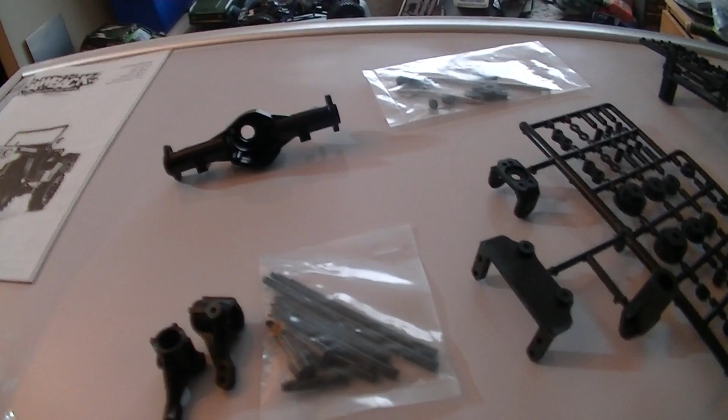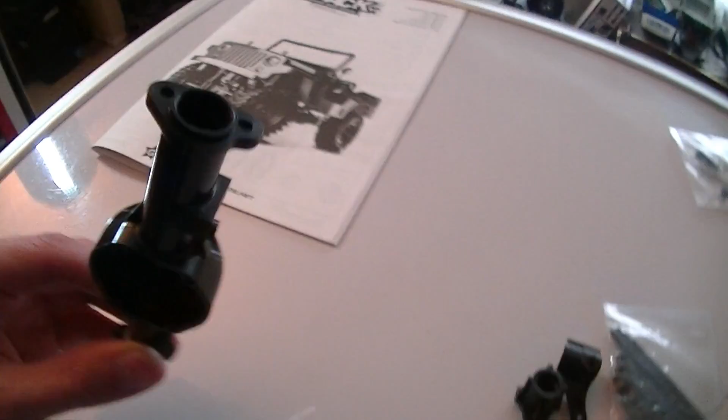But there are a few things I want to point out because, like most of you know, I run Axial like crazy, so just a couple quick things that are differences. Solid axle housing instead of having a two-piece like an SCX-10, so you got the cover off the back like a little Wraith. Then the C-hubs don't sleeve over, they just kind of got a little bit of a flange there. Let's see if we got better light. And there's just a bit of a flange there that looks like the C-hub. There's one there, I'm just going to go over.

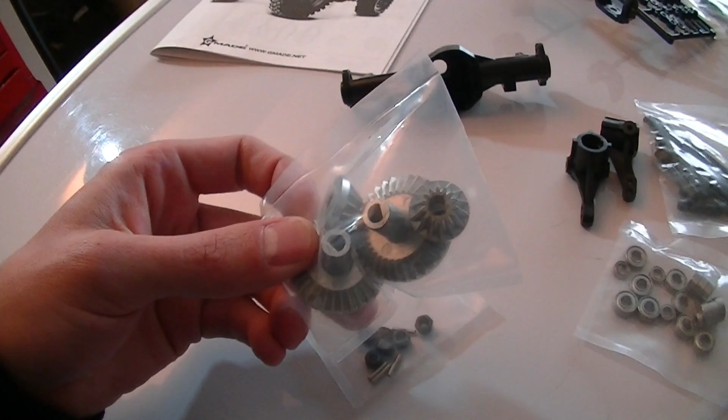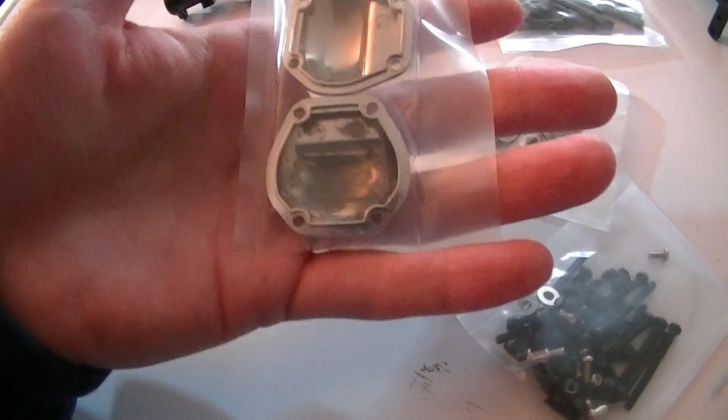Servo plate, I haven't gone over all the parts. There's all the bearings, it looks steel shielded on both sides. Solid center diff pieces instead of having the two-piece like the cup inside with the locker in the middle. Those covers are metal, those are cool. One of them is starting to, not corrode, just starting to oxidize there now. They give you grease with it, which is nice. A little Allen key, I don't know what that other piece is for yet, but alright.

So I just wanted to point out, that's all I'm going to do I guess, is just kind of show you the differences. Comes with, those are your steering links I would imagine by the look of them. Comes with aluminum steering link, or steel, it could be steel steering link. Alright, yes. Any other differences that pop up, I will show you. I guess those are the knuckles? No, those were the knuckles.

Alright, do a little bit of assembling and get back to you.

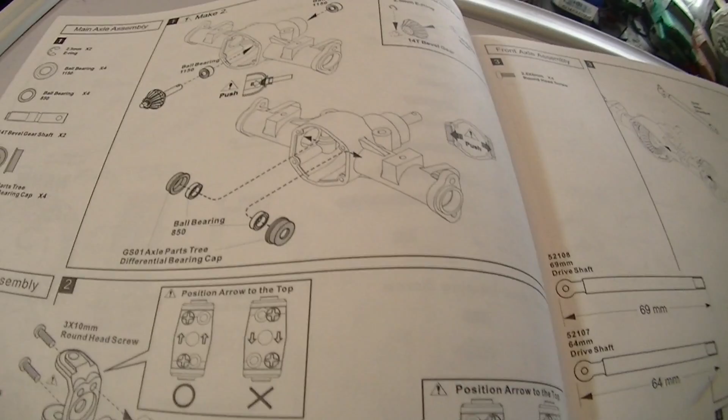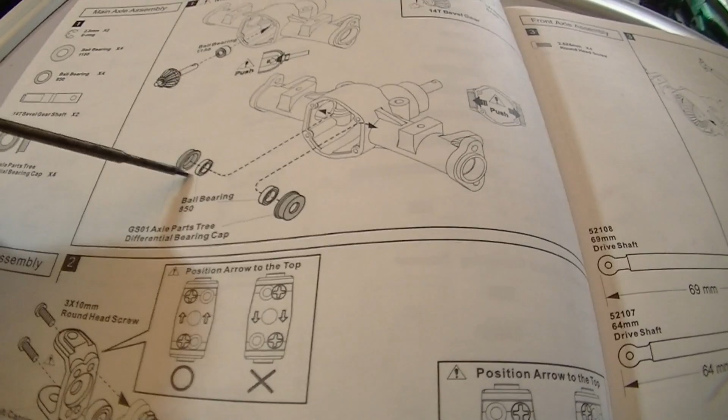Okay, so as I move on, I'm just going to show you guys the funky stuff that's different from an SCX-10. It's funky to me anyways because I don't know Gmade stuff. But anyways, as you can see inside the axle housing, it's easier to see in the drawing than it is in the real thing, but there's this big gaping hole, as you can see, this chunk of plastic. The bearing goes into the plastic, and then the plastic gets inserted into the axle housing, and that's what supports the drive shaft instead of the gear.

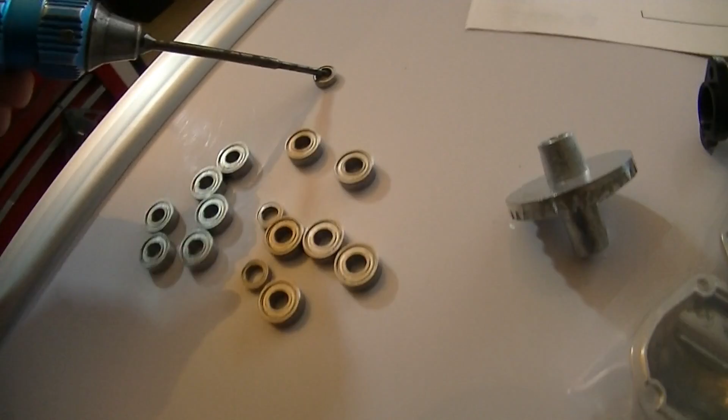So I don't know about that myself. It's these pretty small, little ones, they call it an 850 bearing, so I don't know if that's 8.5 mil or what, I don't know their numbers. But yeah, I just thought that was weird. Must push them out, so you got to seat them in there. That's weird, I don't know. We'll see how far that lasts, and then I might as well show you now.

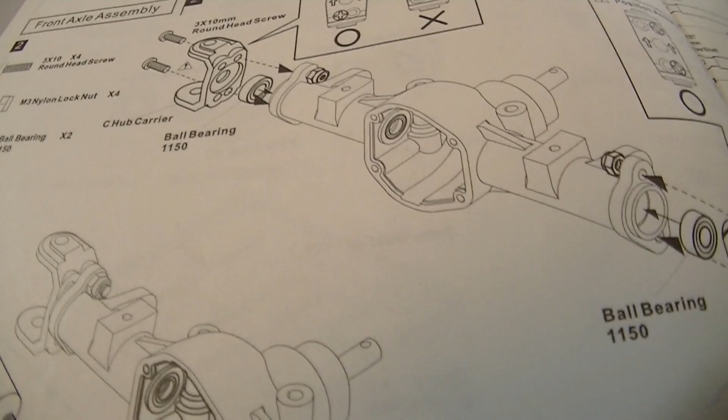The knuckles are these plates that go into the end, or no, that's the C-hub. Sorry, the C-hubs are so different, but the bearing seats into there. Yeah, so it's different, that's for sure. But you know, it's moving along. Alright, back to work.

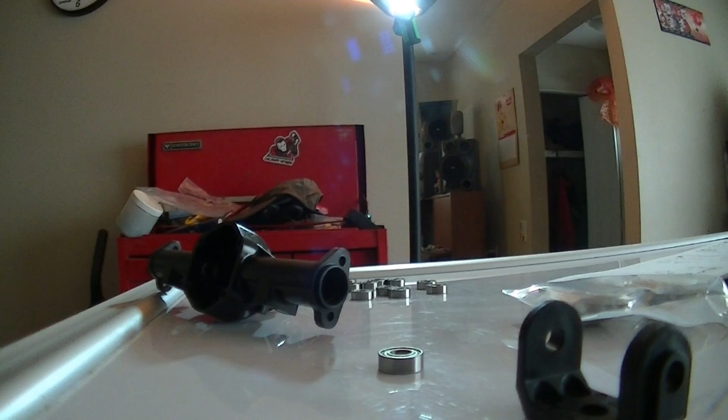Just rest this, that'll be okay. Sure, that works. So the bearing gets inserted into here, into the end of the axle, and then there's a small sleeve, or flange if you will, that just holds that there. And there's arrows on it that point up, so I'm matching the picture. If that one goes that way, then the other one gets snapped in there.

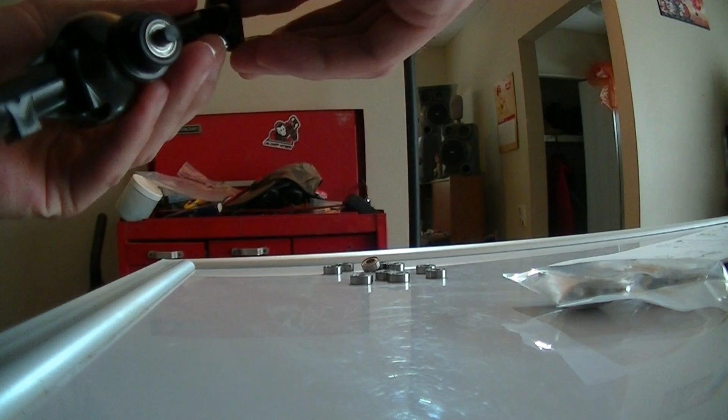There's another one of those plates somewhere, or the C-hub I guess this would be. What are they calling it? C-hub carrier. So I already got the bearing in there, arrows up. And then it gets two screws that holds it into there, and then we'll be putting in the shoulder screws.

It doesn't look like it uses, you can see here, it uses a shoulder screw, or a step screw they're calling it, instead of using the little top hat that the Axial uses.

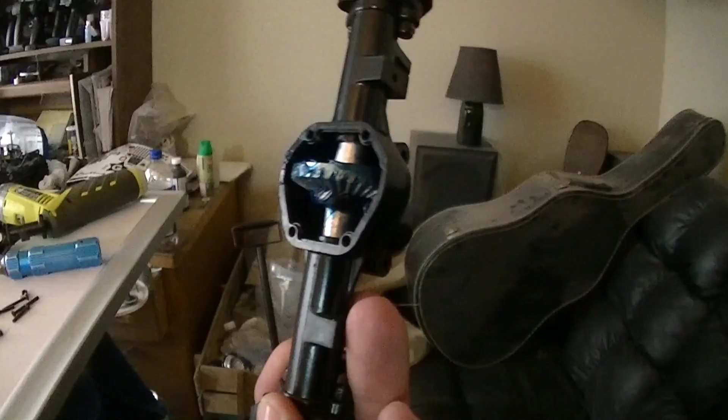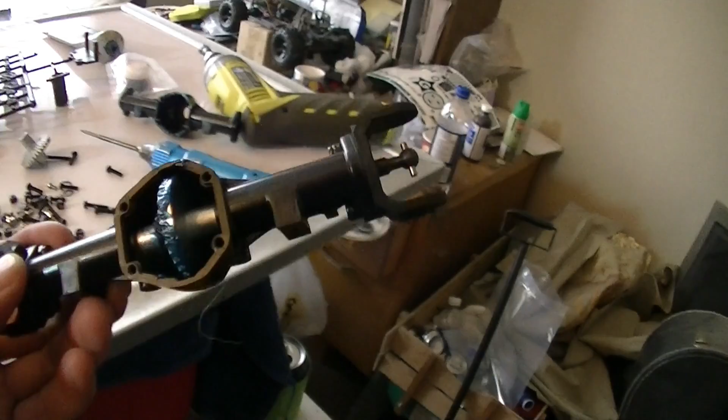Alright, moving on. So I got the gears installed, and then I got it greased up and assembled. It just seems weird to see the center diff like that, and it's not using any bearings - the bearings are inside the axle housing, inside those plastic sleeves. Just wanted to show it like that before I put the knuckles on and get that metal cover on there.

And then on to the next one. I'll get those two built, and I think it's either tranny or chassis next. We shall see.

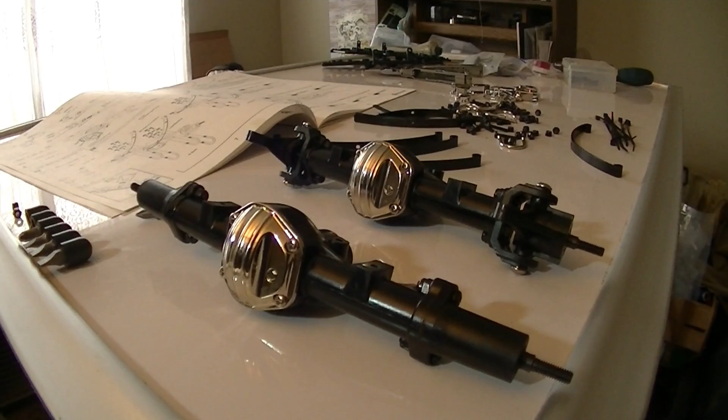Alright, so the axles are assembled, the knuckles are on, but I haven't done the steering yet, because I'm just going in order of the book, following it. So this is pretty interesting. Oh, the fun of kits, aren't they?

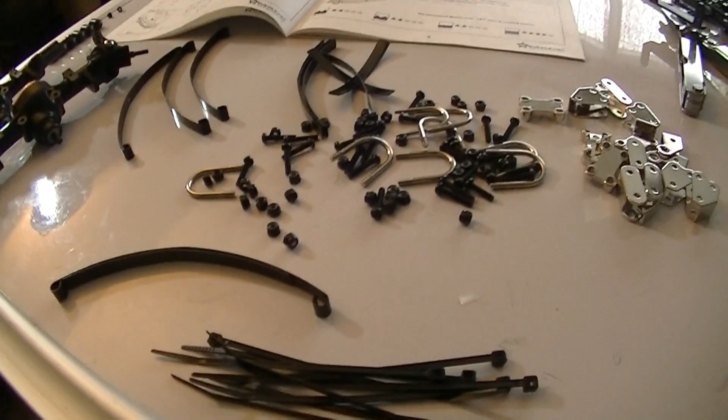Twist, twist, turn, turn. Well, I got my little Ryobi drill helping me out there. But anyways, this is what I was going to show you. So you get the three sets of all the leaf springs, three of them per, if you know what I mean.

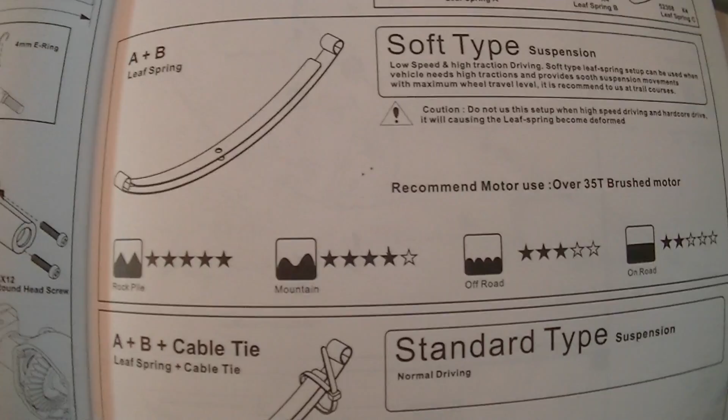Anyways, in the book it's giving you the leaf setup type. So you got the soft type, standard type, and hard type. Obviously with 3 springs, 2 springs, and 1 spring, or just setting it up with the small one and the big one, and then the medium one and the big one, or using all three to make it all stiff.

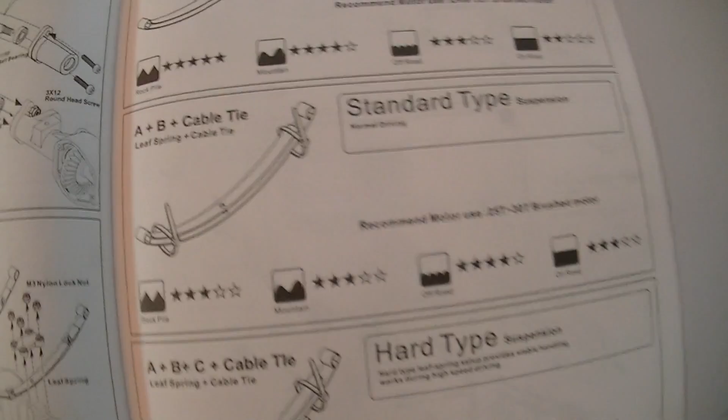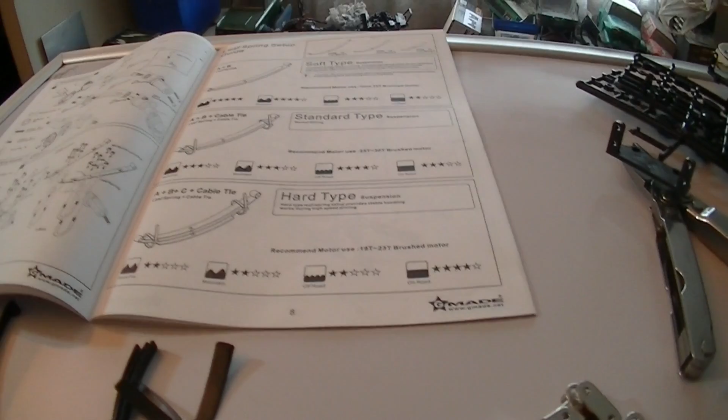I'm going with the medium one and the big one, and it's got motor recommendations there as well, for a faster truck. But see, without a roll cage, there's gonna be no roll cage on it, it just has the windshield up there. I'm not too keen on rolling it over, although I know I'm going to get dick moved more than likely by SS Louis, if not Crawler Ted, maybe even Penguin. Hopefully it's not Penguin, because he's going to mess my shit up.

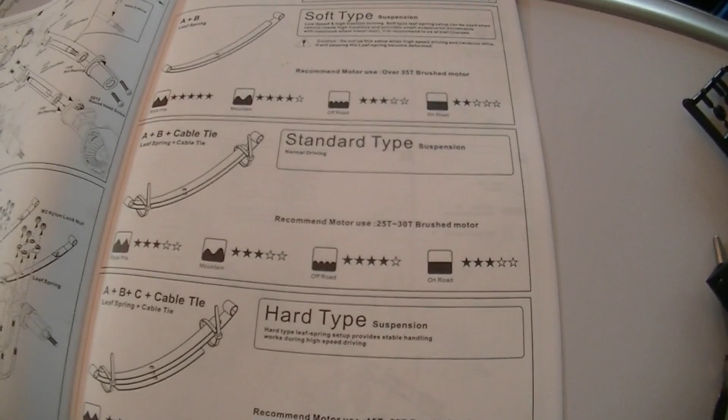Anyways, I think I'm going to go with the DeWalt on 2-cell, and the DeWalt on 3-cell is about a 20 turn, so I'm saying it's about a 27 or 30 turn, which works out perfectly for the standard type setup. That's what I'm going to end up going with. I just thought that was pretty cool. Jeez, doesn't that all look like fun, eh?

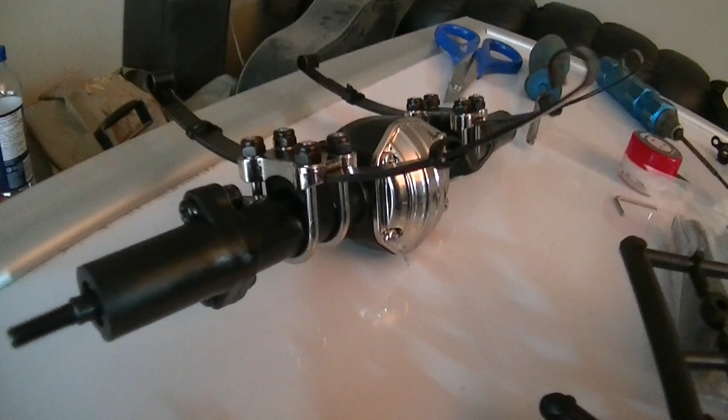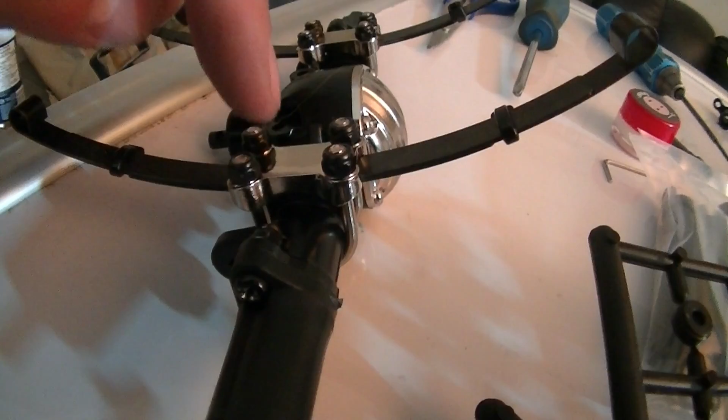Ah, kids, good times. Alright, I've been trucking along for a while. I've already got the axles good and assembled. I can't remember what my last clip was, to tell you the truth, but the leaf springs are in and assembled. It's just a pin right in the middle, in the bottom of this plate that goes through and lines up with the holes in all the leaf springs. I ended up going with the full meal deal, and I got all the toughest setup.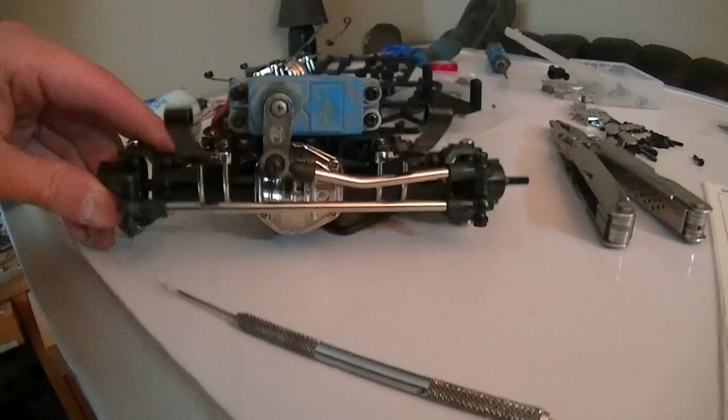I even got the zip ties on there. The steering's been installed. It comes with steel steering, which is nice, and those caps are sharp. I love looking at those. Alright, and right now I'm on to the tranny, and yes, it does have plastic gears in it. We'll be looking for upgrades to that.

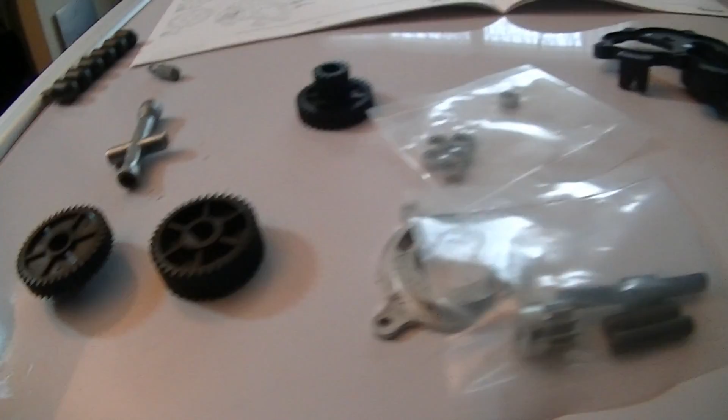Still got to do the shackles and whatnot, or whatever they're called, to the drive shafts and blah blah blah, the chassis and the skid plate, and oh my god, there's still so much to do. The part that worries me, and the main reason I turned the camera back on for the tranny, was these little bearings. They call them the 850 bearing.

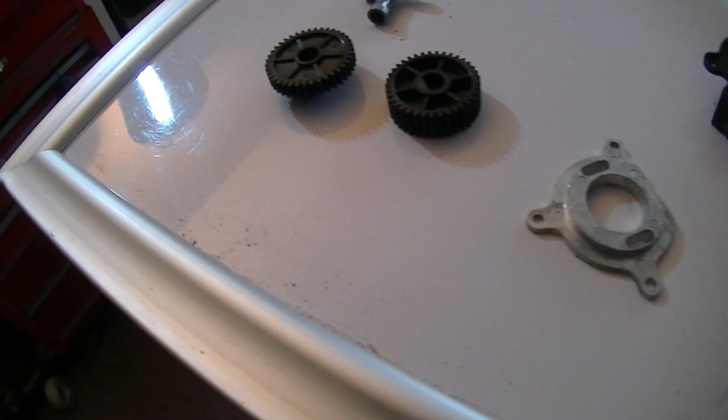Again, I don't know, I only know millimeters. I don't know what the 850 means. I'll have to find out later. Or you guys probably already know. But yeah, I just wanted to show that those little bearings kind of worry me. Alright, there you go.

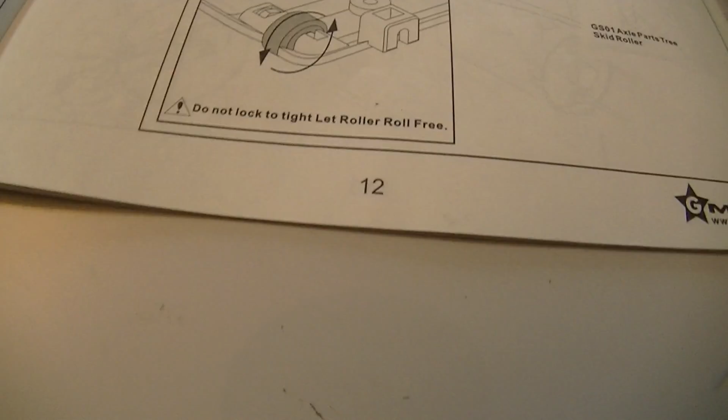Alright, just found something else kind of interesting in there. It's called a skid roller. There's little wheels that go on the bottom of the skid plate. So when you're driving over stuff, they're supposed to help. There, we get some light on there. It's supposed to help you get over stuff. Pretty wild, eh? I don't know if it's going to help or not, but that's cool.

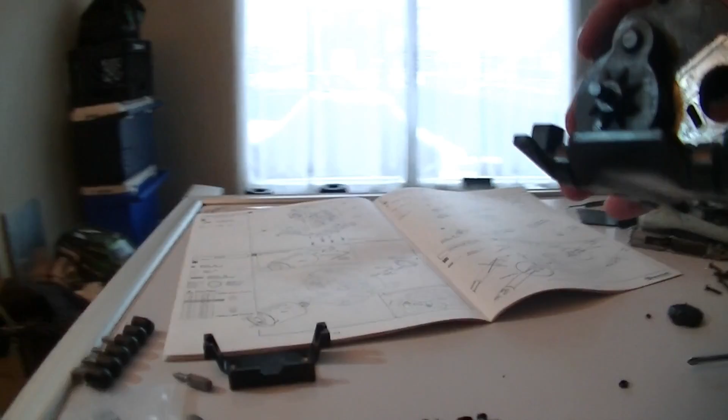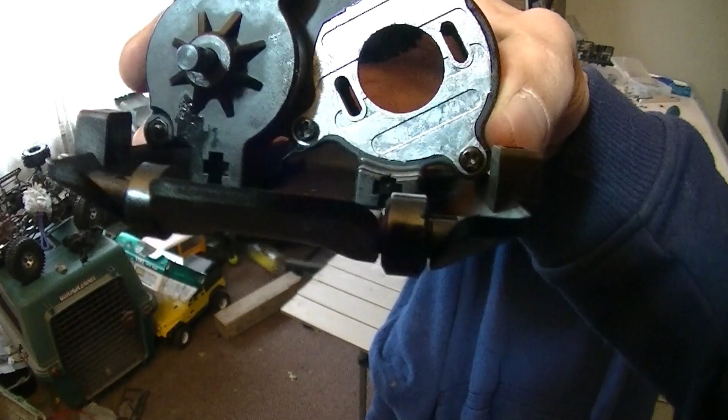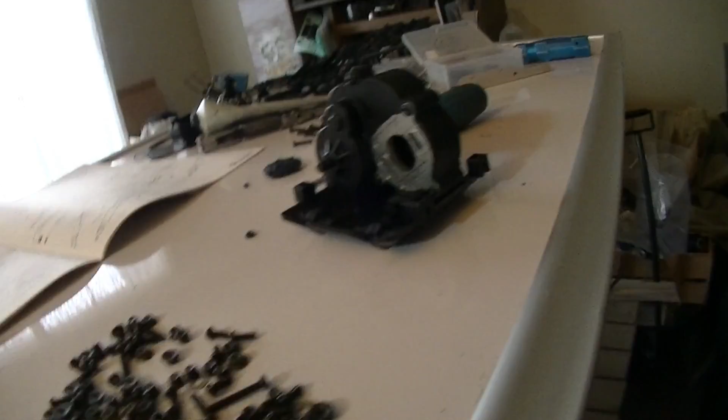So you slide in the nut and then you put the screw in from the bottom, of course. And you're not threading into plastic, you're threading into metal, or into the metal nut. It's great. That should be stronger, but we'll see how it goes.

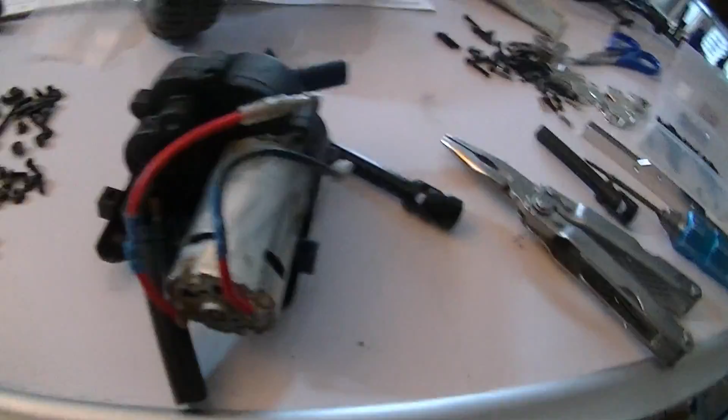Alright, so as I trudge on, I'm getting tired. I've been at it for a good 3 or 4 hours with about a 20-minute break in there or so. I just got the trannies done being assembled with the motor attached to it. It's a DeWalt 12-volt big shocker with whatever the stock setup is.

32 pitch, 12 tooth gears in there. But I wanted to look at the shafts. The shafts are pretty beefy. They're pretty much the same setup as the stock SCX-10, or the old style ones.

Those are the new style ones. I don't have any of the old left, I don't think. They're all gone. Or is that one right there? That looks like it might be one.

Hell of a look at the difference in the size of those two shafts, from an axial one to the Gmade drive shaft. I don't know the name of them, if they have a specific name. Universal shaft assembly, blah blah blah. I don't see a name for them. But anyways, yeah, they're pretty beefy, huge compared to the SCX-10 ones. Just wanted to throw that out there.

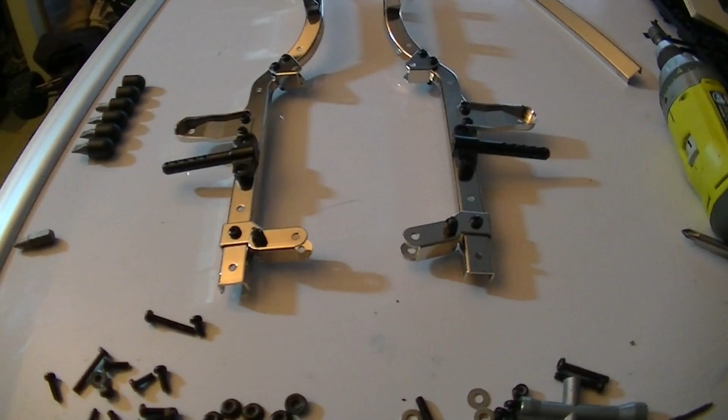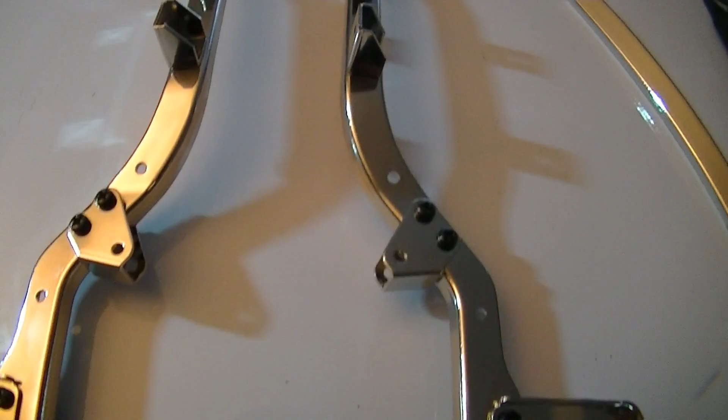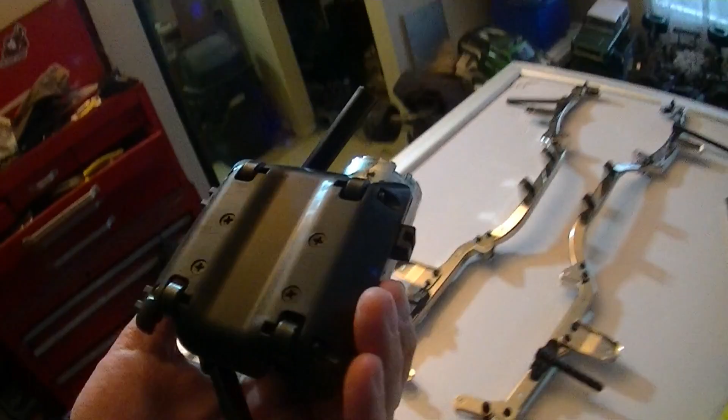Oh, it was so much work to get to this point. There's so many screws and bolts in there. It's looking great though, it's just gorgeous. Shiny. The tranny's mounted to the plate with the little wheels on it. That's just awesome, that's so funny. 12-volt DeWalt.

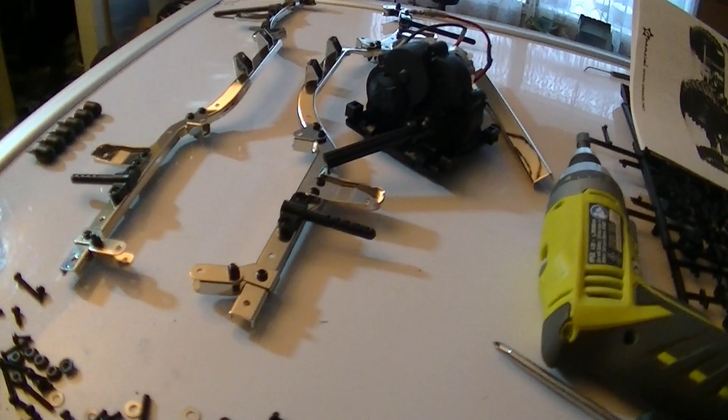Axles. Oh, I need a break for at least a few hours. Maybe finish the chassis tonight and do the electronics tomorrow. Still got to paint still. Oh, so much work, I'm so tired. I'm gonna go, I need a long break. Could be for the night. I don't know, good night for now.

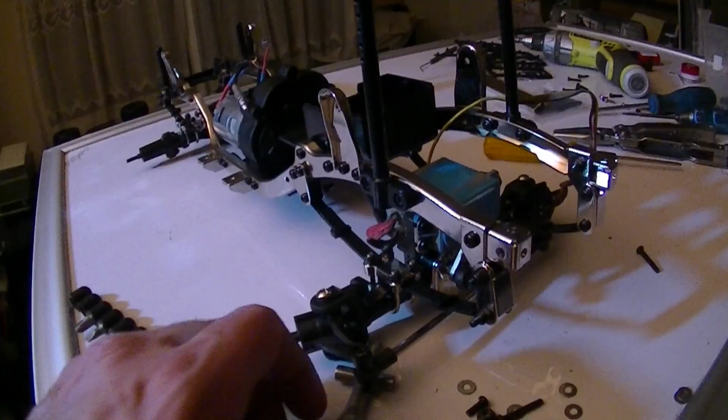Alright, so I took a bit of a break, but I have been working. I came upstairs and I've been working away for like half an hour, an hour or something now. So the chassis is assembled and I got the receiver box in there.

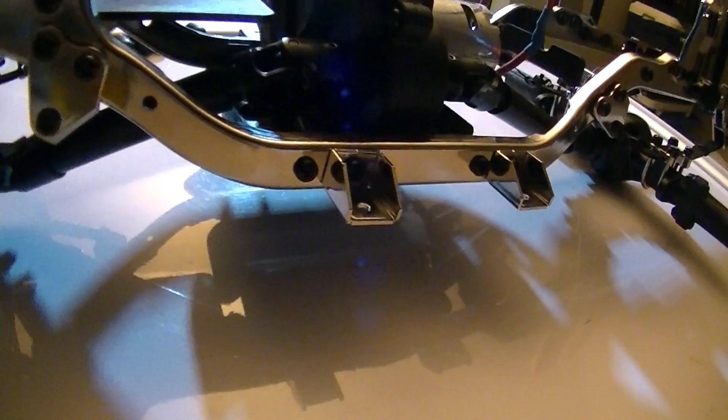It looks like there's a plate for the ESC. A battery tray goes in the back, I'll just use a Velcro strap for that. Oh, I just noticed I put two things on upside down. That's going to be a slight pain to fix, maybe. Hopefully not, probably not, I think I could fix that quickly. Let's see.

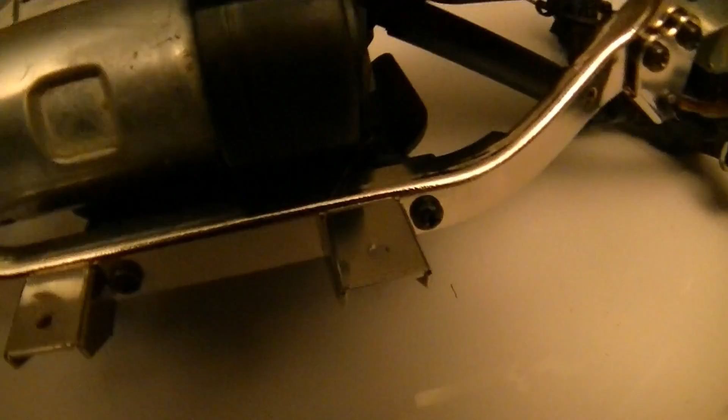Everything that is screwed in from the side that on an SCX10 you would normally strip out, like on the plastic parts, the cross members or whatever, everything uses a bolt. Some of them are a flanged nut, some are a nylock. But even the skid plate is held in there. Man, I don't know if there's enough light. Even this skid plate, there are little slots for where the nut gets dropped into.

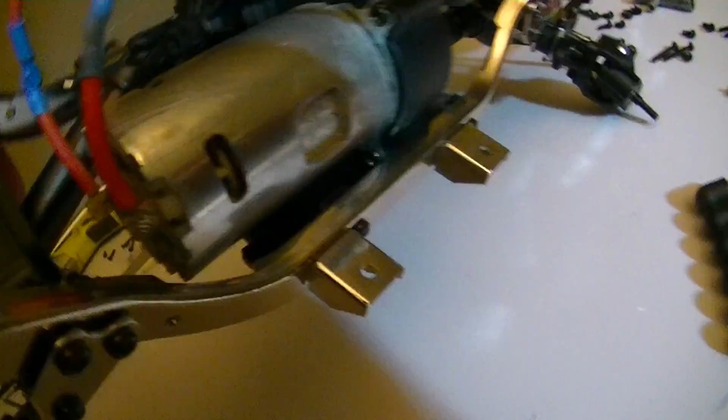Oh, the lighting's terrible, hold on, let's see if I can get this. There we go, should be able to see that hopefully. See right in behind there where the screws are, there's nuts in there, and they're all like that.

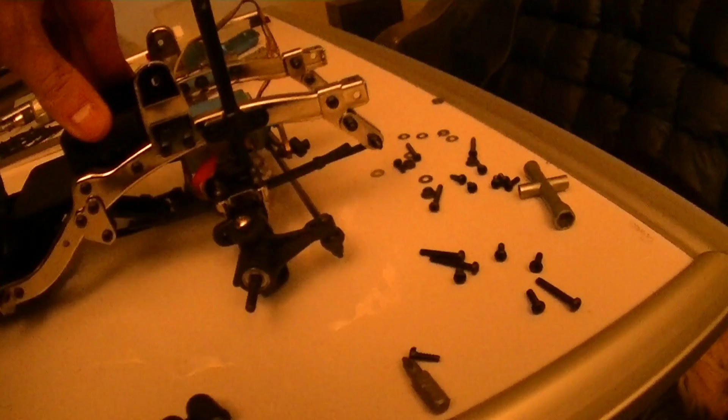I know I'm really tired and sluggish and talking funny sometimes because I've been working at this all day and my brain's a little mushy right now, but I'm not minding the springs too much. The rear seems a little stiff, I think I gotta back some screws off. I really like the action out of the front though, it articulates decently. I like the function of it so far, but I gotta get tires on and get some weight in it, get some more going.

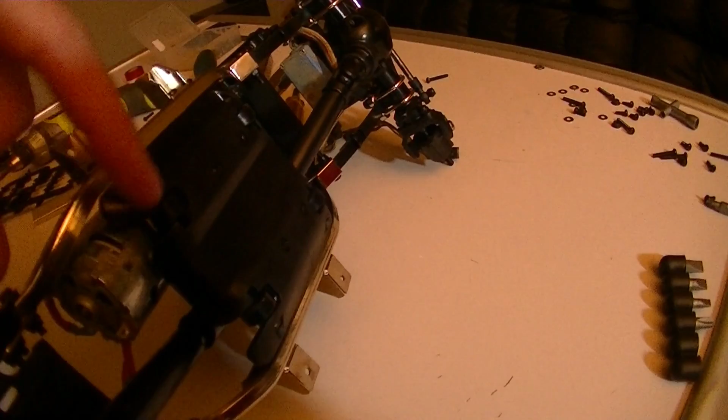Oh yeah, I forgot, that's one of the main things I turned that on for. Check that out, there's little wheels under there. I think I mentioned that before, I'm just showing it again because it's cool. Alright, it's a rolling chassis.

I am pooped, I'm tired. This thing is gorgeous, I love the hoops that go around the axles for the springs, shackles I guess they were. The chromed up chassis looks just awesome. The front bumper's plain Jane, like just a slab of steel, but it's wicked. Those tires are nice, 11.5 inch wheelbase, 2.25 inch skid clearance.

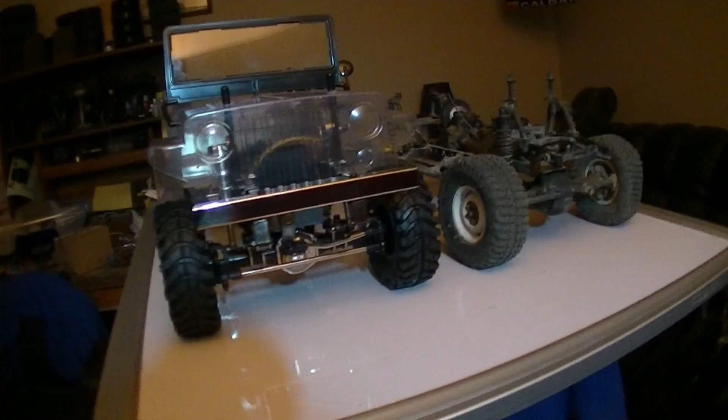The sawback has been cut and drilled and some of the accessories popped in just to test for fit, so the shift is in there. I didn't put the seats in, but I know they're going to be fine. He's just holding onto the steering wheel for looks. The windshield actually just pops in there, so you can see extra plastic has gone inside. I figured I'd show you this before I painted it so it's easier to look at.

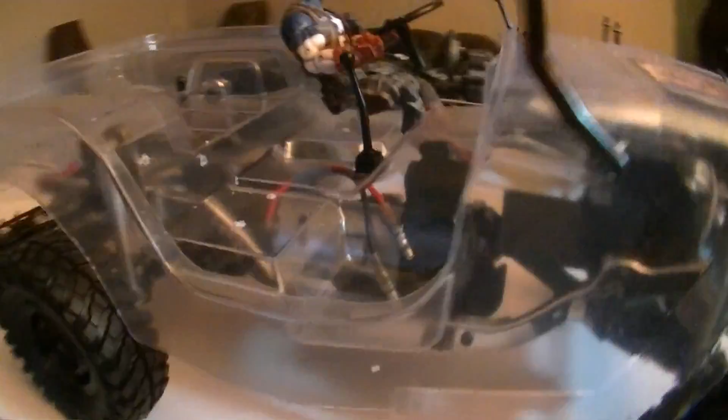Same thing with the mirror and the gear shift, they're just popped in there, but those two are held in by a body clip. This center piece is held in by a body clip as well, which is not in there right now. The windshield is separate Lexan or plexiglass that's just held in there with grooves on either side, so you just snap it in place. It's in there pretty good - solid black plastic, and I didn't have to paint it, which I really like.

I got it sitting beside a stock, well, the closest thing I have to a stock SCX10, pretty sure it is stock except for the tires, just to do a comparison. So my final overview comparing the Gmade Sawback and an SCX10 - it wasn't meant to be a versus, it's just my best thing to compare to.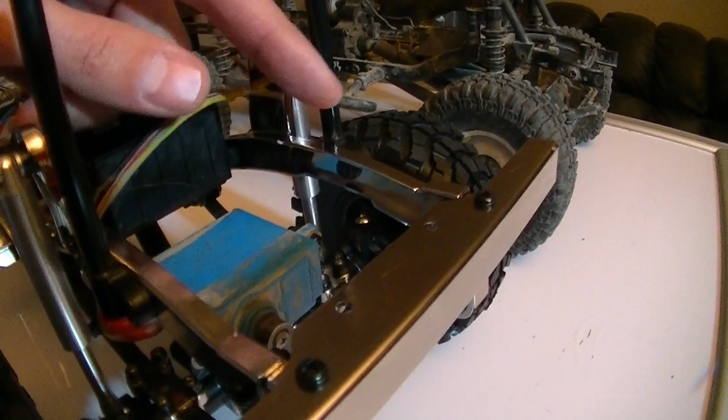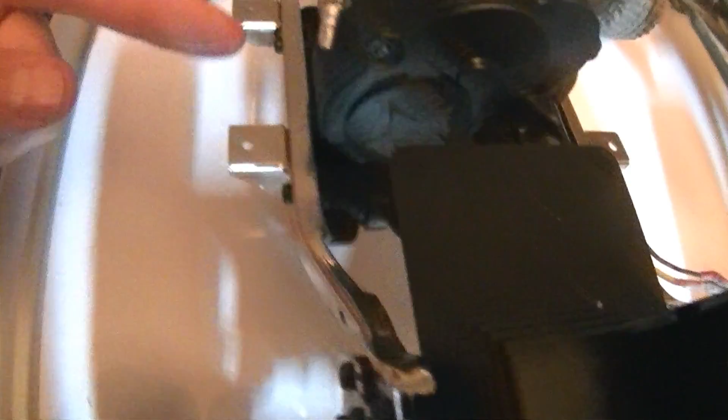One of the main things I noticed about this truck is that everything on the side that's held in place to the chassis is held in by a nut. Nothing is screwed into a piece of plastic in this truck anywhere, even the skid plate - there's a nut that drops into the slot, and then the screw goes in. The only thing I don't like about the screw kit and nut setup is everything's with a Phillips.

There's no hex head in this thing except for the grub pins, and they're 1.5, not a 1/16. Everything else is held in with a screwdriver. I just didn't like that. If there's a screw kit out there to change it over to a hex, I'm definitely going to.

Shock hoops - super strong though, it's like made of steel everywhere. I was just about to mention the shock hoops on an SCX10, you get the plastic shock hoops. Canadians will know they're weak enough in the summer, but in the winter they're just terrible - you do a rollover and you're almost guaranteed to break a shock hoop. But the Gmade ones that come with it are solid, man, those are some solid metal in there.

Then the internal shocks, I don't like their setup, I don't know if I did something wrong there. Post up if you guys know I did something wrong, but the shocks just seem to slide back and forth on top of the balls that come with them. I don't know if there's a spacer missing - I followed the instructions, that's how they say they're supposed to be, but it just seems weird and sloppy to me.

The transmission - a couple guys have already commented on other videos that they're not a big fan of it because it comes with plastic gears. Come on guys, every SCX-10, the Wraith, the AX-10, everything comes with plastic gears. Somebody's going to make an upgraded set of gears for it, so go ahead, dive in there - there's going to be an upgraded set of gears, I have no doubt.

The other part is inside this tranny, the gears aren't 48 pitch like the SCX-10, they're 32 pitch in here, so I think the gears are going to last longer. But what I don't like about the gear setup is all those little 850 bearings inside the tranny, and also inside the axles. Remember from the beginning when I showed you the inside of the axles - the center diff isn't supported by bearings, it's supported by the drive shafts, or axle shafts, and those axle shafts are supported by those little 850 bearings as well. So we'll see how that goes with the inserts inside the pumpkin.